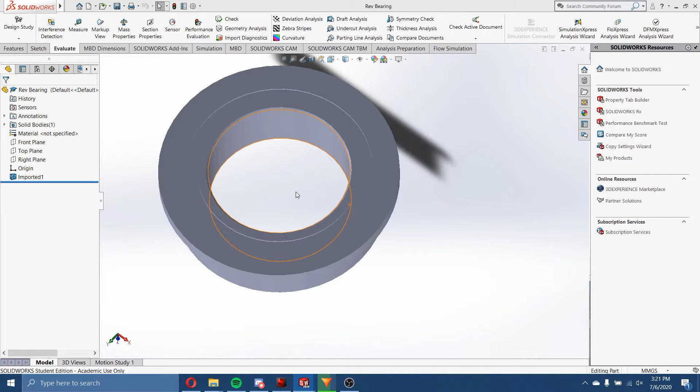You might use this if you have REV components such as REV mecanum wheels, but also want to use goBILDA components without having to buy completely new parts. This can be useful for a lot of teams who already have existing parts and don't have the budget for newer parts. To create a bearing adapter, we're going to start by creating a simple rectangle that mounts to these goBILDA holes and can hold the REV bearing inside of it. This piece can be 3D printed.

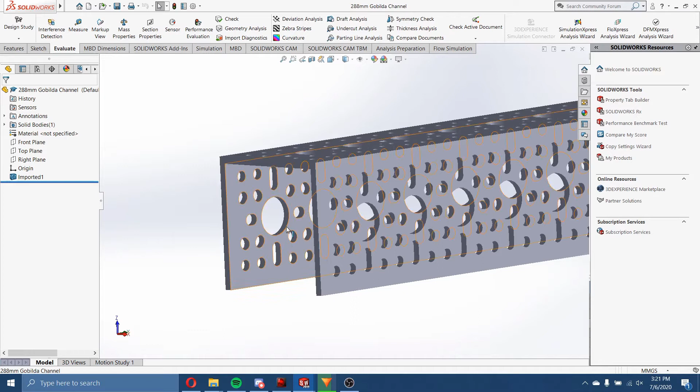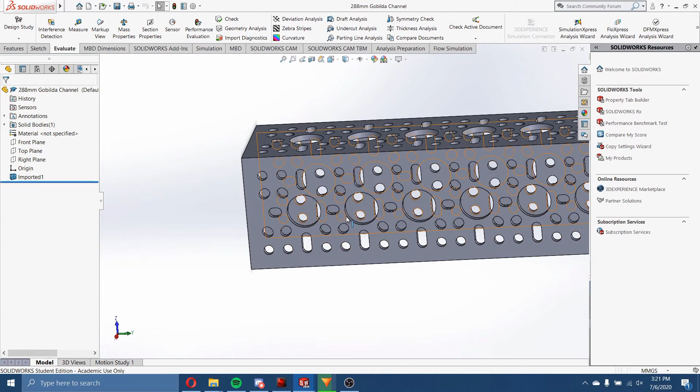Let's start by figuring out exactly where we want this bearing block to go. To make it easier to see the contours and dimensions on this part, we can go up to here and click this top feature. This will make it easier to see the definition and different features of this part. Now we want our part to be fully constrained, so let's not rely on these slots over here. We can make it big enough to go from here, around down here, over here, and then around here, in one big rectangle, and bolt to these 4 holes. Let's start by defining those holes.

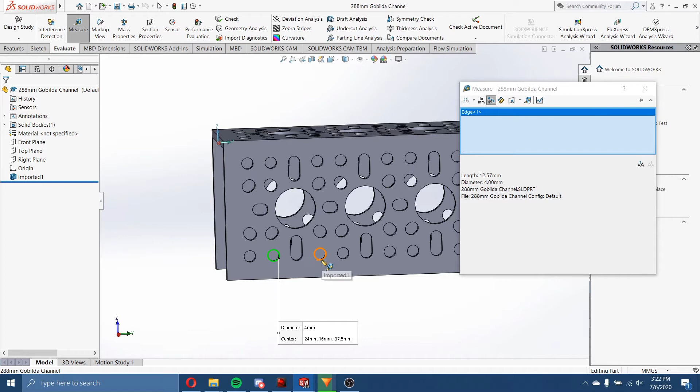Use the measure tool to measure the distance in between these holes. If you don't know how to use the measure tool, check out our previous video on using it. This dimension is 16mm. This dimension is 32mm. Let's go back to the original part.

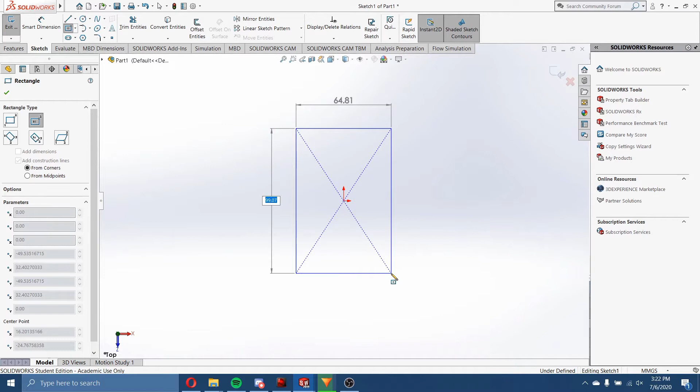Start by clicking Sketch. Here you'll be able to select a plane you want to sketch onto. Let's select the top plane. Let's start by creating a rectangle with those dimensions. Let's create a center rectangle. Now click here for Smart Dimensions. Smart Dimensions allow you to easily dimension different parts of your drawing. Let's go here and set this to 16mm. And this to 32mm.

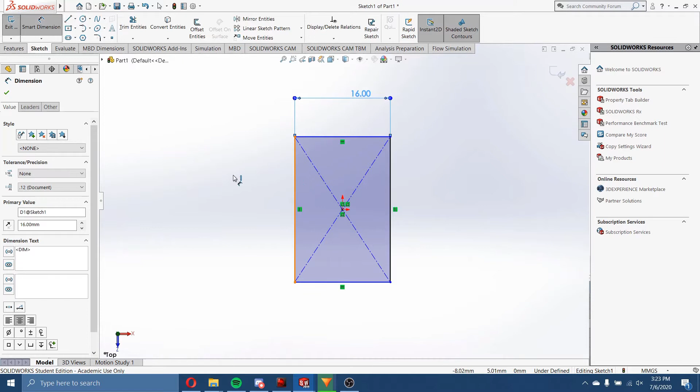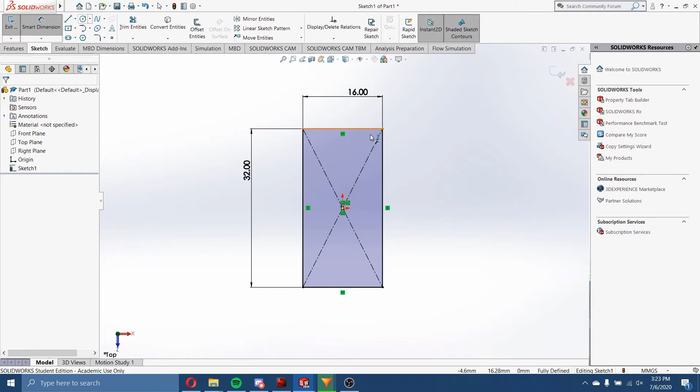You can change the units down here, so you don't have to type in the units into the box. Now that we have this basic shape, let's add some holes at the corners. Click up here for the circle tool. Now let's draw some holes. When you 3D print something, generally holes shrink, and since we have 4mm holes in the goBILDA channel, and the 3D printed part shrinks, let's make these 4.2mm in diameter.

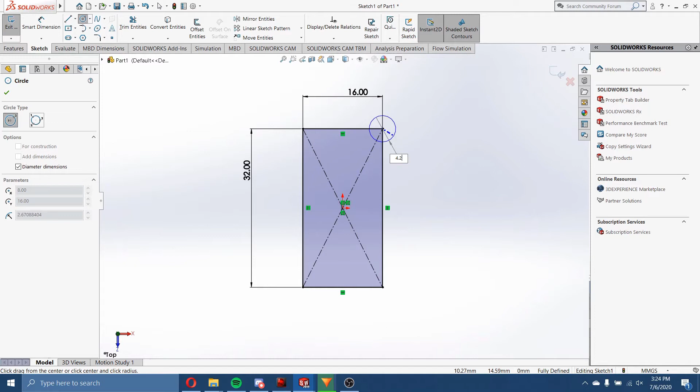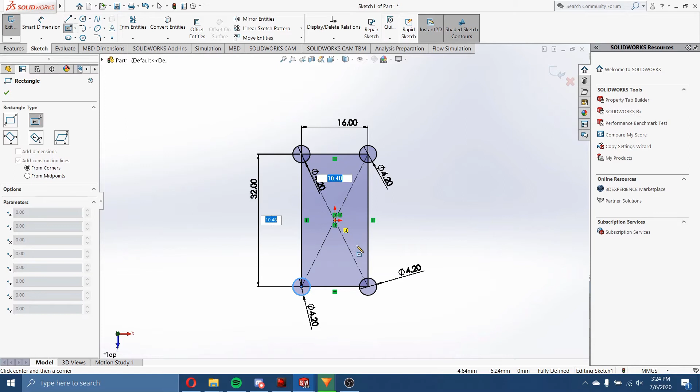As you can see, sometimes I'm using a smart dimension and sometimes I'm just typing in the dimension. This is a setting that can be turned on and off automatically through the sketch settings, found by going here. Let's create all these holes. Now let's create a bigger rectangle around this entire part. Let's make it a little bigger than what we already have, but not too big.

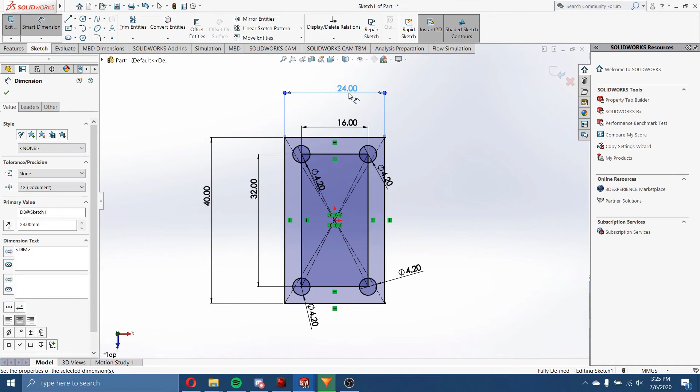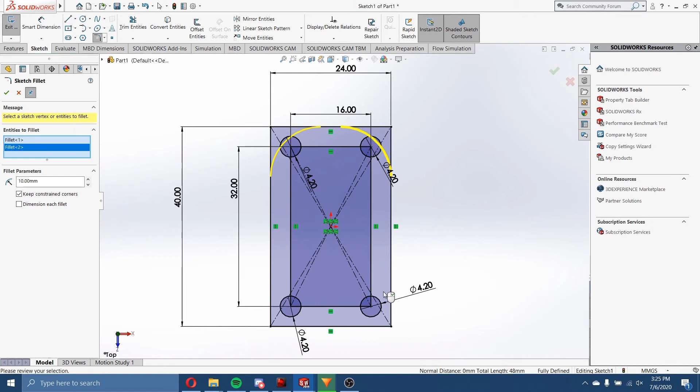Now let's make this look better by adding a fillet to the edges. Click up here. Now let's click these 2 edges. Then click these edges, and then click these edges. This radius is really big, so let's go over here to reduce the radius. That looks good.

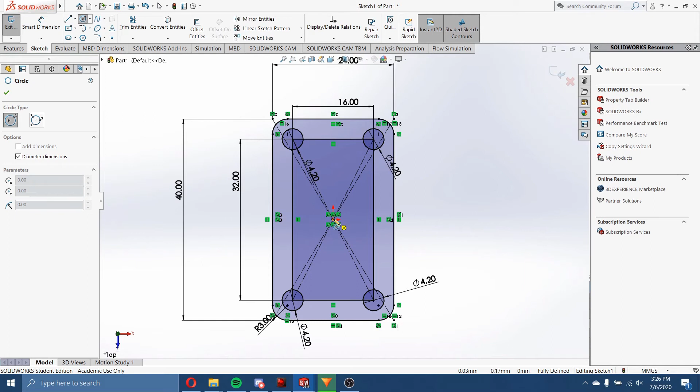Now let's create the hole at the center for the bearing. Go back to the circle tool and go back to the center. If you're at the center, you'll see this tiny little yellow thing right next to your pointer. Those are generally snap lines. If you see here, you can see that it means we're on an intersection. You can also snap to centers or draw out from a center.

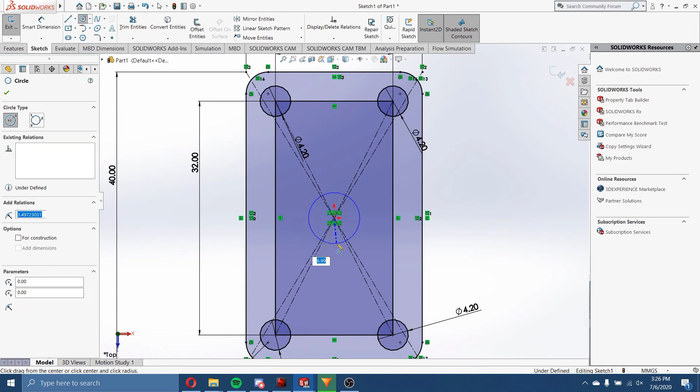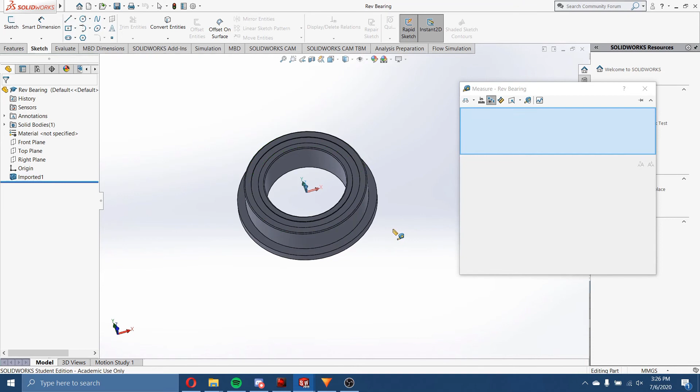Now let's see what size to create the hole. Let's go back to the bearing by using Control-Tab. Again, let's make this easier to see. Click Control-M and do this to measure the diameter, which is 12 millimeters. If you're also measuring diameters, you can always click on a curve and then see the diameter down here. Again, since our 3D printed part shrinks a little bit, let's make this 12.1 millimeters in diameter.

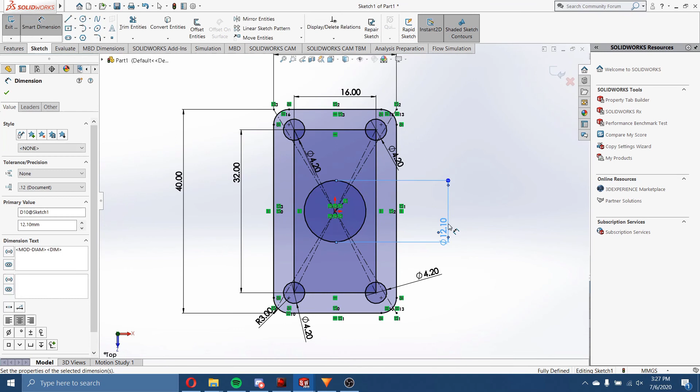Now let's exit the sketch. Go here and click Extruded Boss/Base and select all of the areas we want to lift out of the page. As you can see, selecting different areas lifts them out of the page. You can select this area, then deselect it, because we don't want that area.

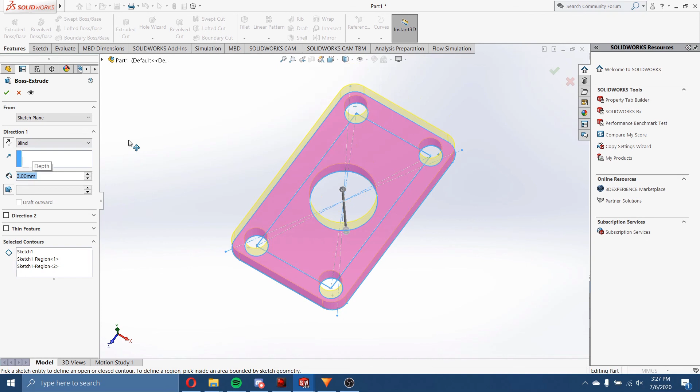Now let's check the height. You can either drag this to change how far up and down you go, or you can change the height here. Let's make it 3 millimeters thick. Click the check mark to finish. Now you have your first part. Let's save this. Congratulations, you've created your first part.

In our next few videos, we'll be showing you how to use this part in assemblies and how to add more advanced part features and use different things on your parts.